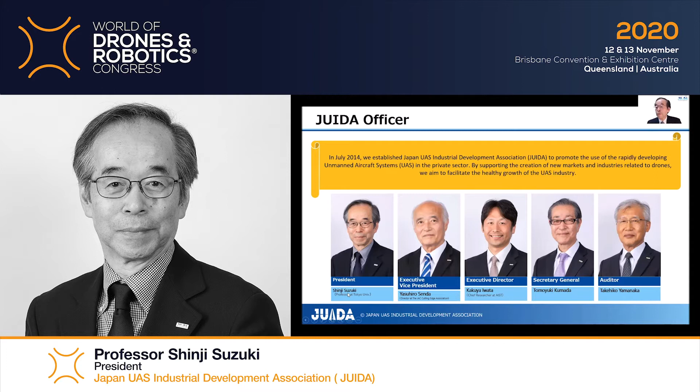I understand that everyone is living in quite tough times due to COVID-19. This Congress is being held after complex preparations.

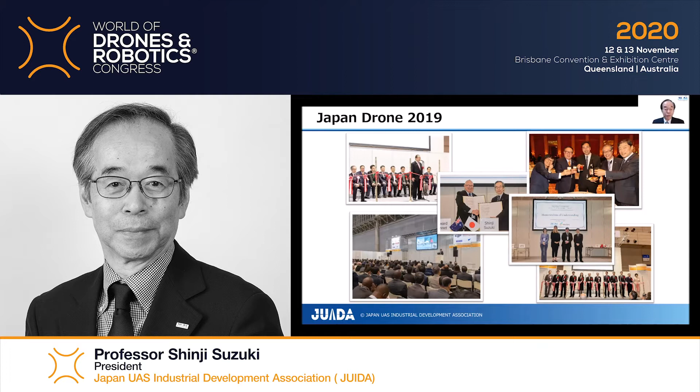JUIDA organizes Japan Drone Exhibition, the biggest UAS trade show in Japan every year. We gather more than 200 exhibitors, 15,000 visitors, and a long list of international guest speakers. We believe in international cooperation to improve and accelerate the growth of the UAS industry.

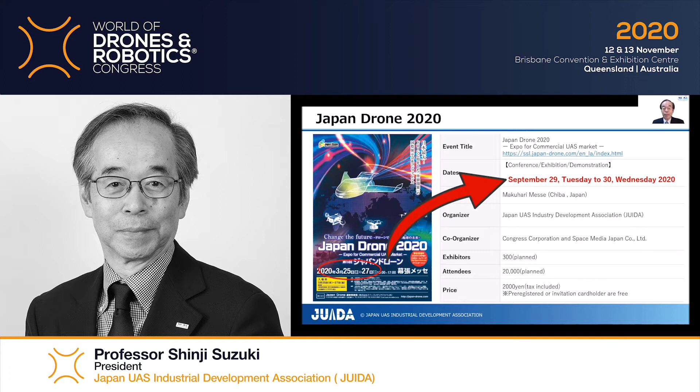This year, it has been postponed from March to September 29-30. The exhibition and international conference was held in a safe and secure manner by taking measures in accordance with COVID-19 guidelines for prevention of infection spread in the exhibition industry.

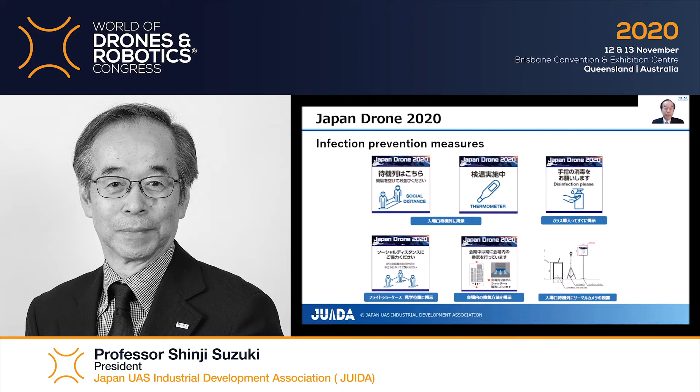This shows several photos of this exhibition, conference, and events. There were new exhibitions, lively business talks, and hot discussions at this Japan Drone 2020.

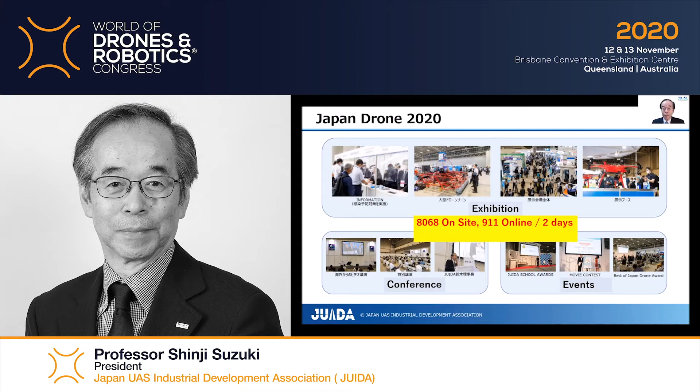Within the spread of COVID-19 infection, drones have shown various activities in the world. This is a flying demonstration using drone in China, and this is a drone spraying of disinfectant in India. This is a COVID test kit transportation using drone in Africa. And the last one is an interesting campaign using drone for social distance and face masks in South Korea.

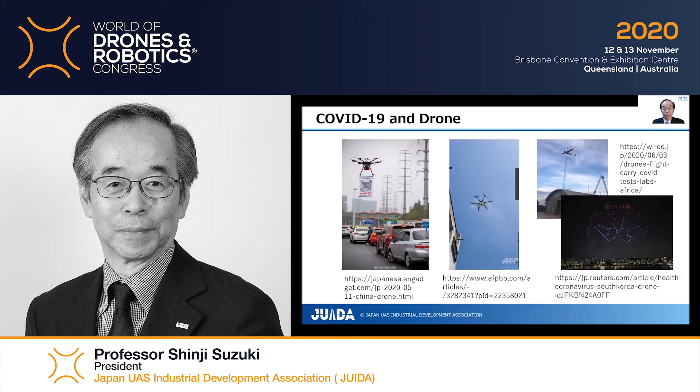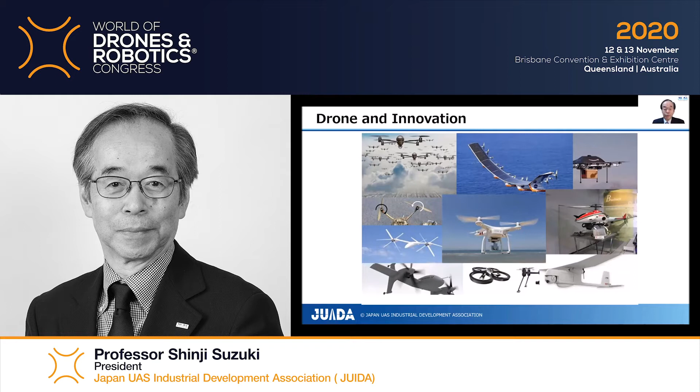These four fields are being strengthened, especially in the industrial field. The first one is drone delivery in remote island and mountain areas, and the second is the utilization of drones in the event of disaster. In Japan, drones are especially expected to play an active role in disaster response for typhoon or heavy rain.

The third one is security and guard application, and the fourth is the medical field. The transport of serum and AED is being considered.

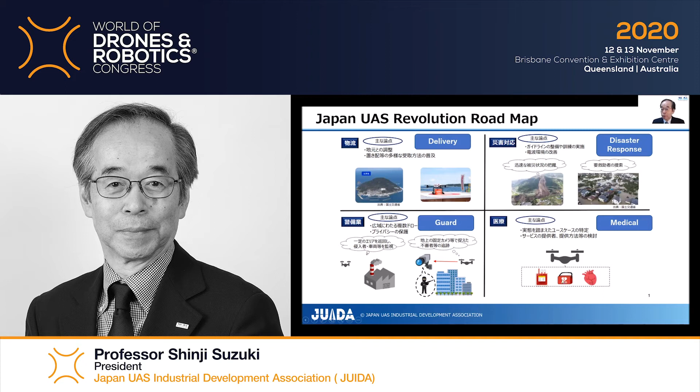JUIDA is active in various fields related to drone industries. I will present to you some of its key projects.

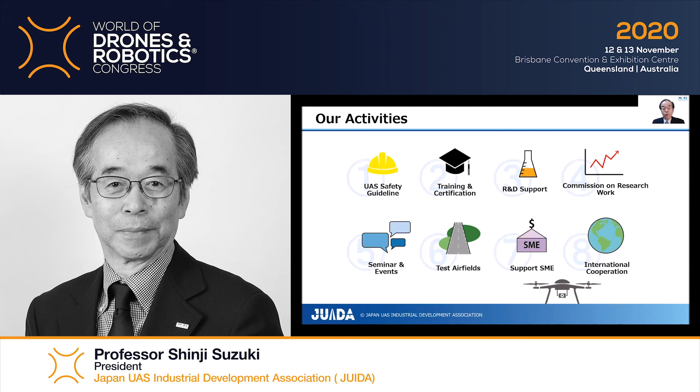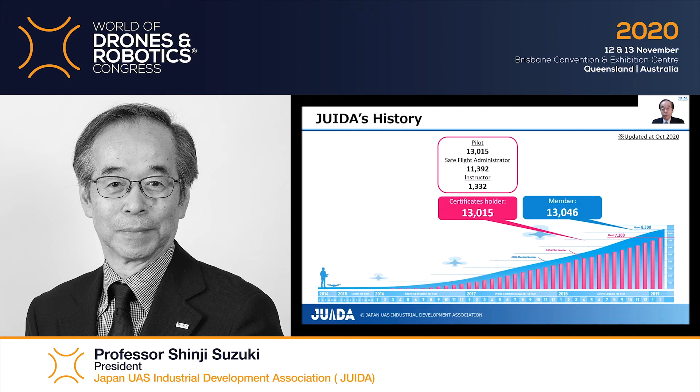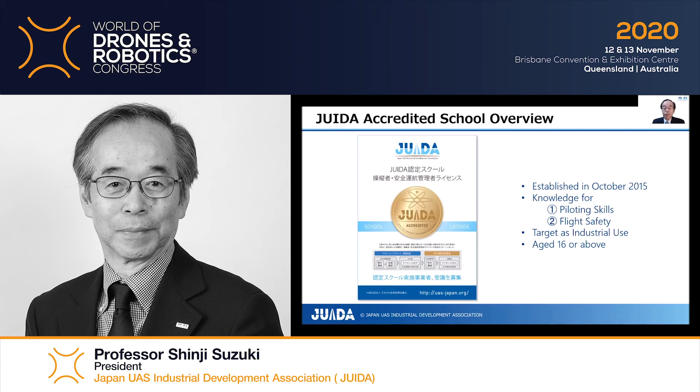Since 2014, we are working with over 13,000 members. It is supported by JUIDA certificate holders who graduate from JUIDA Drone Pilot School. We established the JUIDA accredited drone pilot school system, providing training courses, examinations, and certifications.

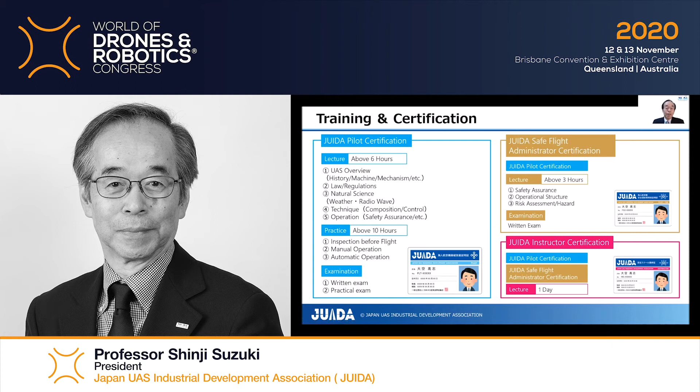Here is the training and certification system in JUIDA. Up to now, more than 13,000 drone pilots have gotten their licenses thanks to our schools.

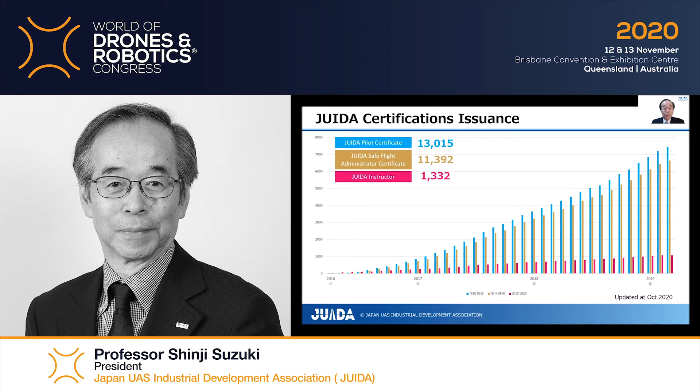There are more than 235 drone pilot schools in Japan, and recently, JUIDA schools have operated overseas as well.

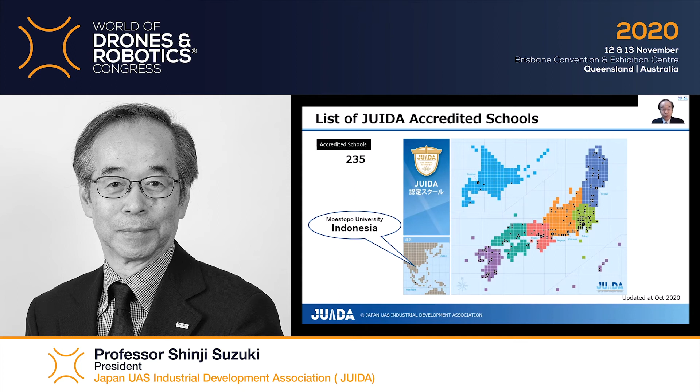The Japanese government has announced a policy to issue a national drone pilot license, and JUIDA will take even greater responsibility as the largest drone association in Japan.

As I explained, we are working to cultivate human resources. These activities have promoted the rapid increase of the drone service market in Japan.

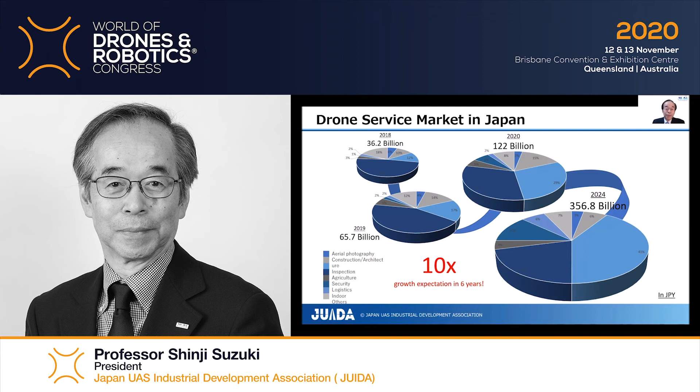Besides, we are part of the ISO International Standard Organization working group that drafts the upcoming standards of the drone industry worldwide. A total of 17 countries work together to harmonize the best standards that will be used by companies.

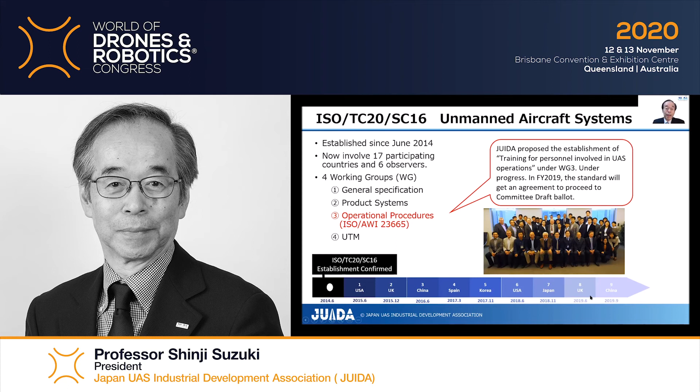In order to establish world standards for the drone industry, JUIDA has signed MOUs with 30 organizations from 21 countries.

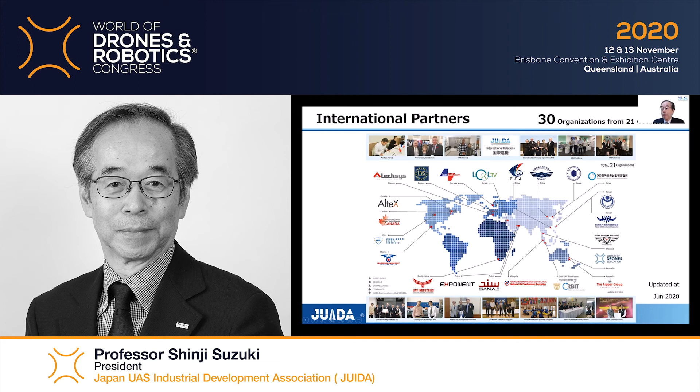Recently, we have been involved in the Fukushima robot test field. It's a large-scale project initiated by Fukushima Prefecture to revitalize the region damaged by the tsunami in 2011. Along with JUTM and JUAV, we carried out test experiments with drones flying beyond visual line of sight.

The test field is now fully open and extends to approximately 50 hectares with laboratories and research facilities. It is composed of 15 facilities onshore.

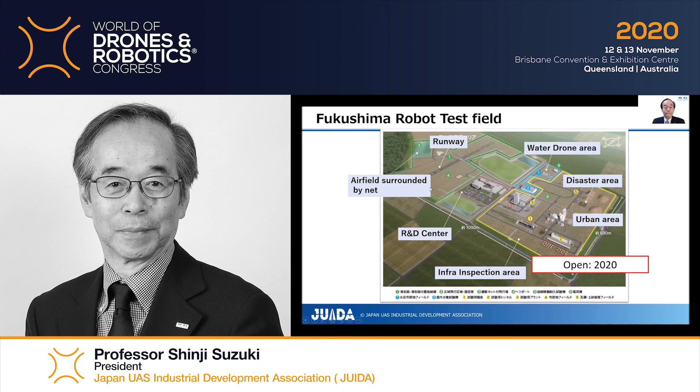It includes an underwater water drone area, a disaster area, an urban model, and infrastructure area with a bridge and tunnel, and chemical plants, an R&D center, an airfield surrounded by a net, and a UAV runway. These facilities were opened this year.

These facilities will be used to develop two passenger-carrying drones in the near future.

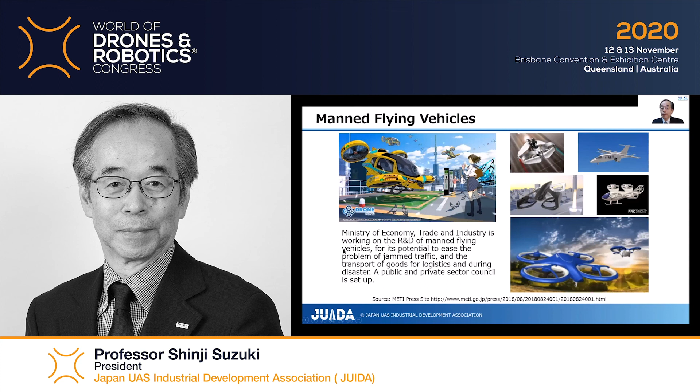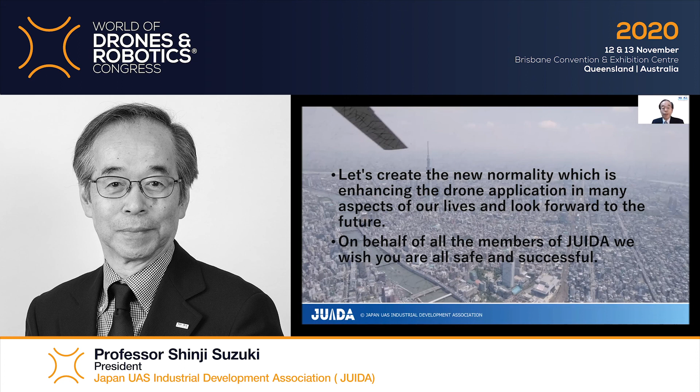Together, let's create the new normality, enhancing drone applications in many aspects of our lives, and look forward to the future. On behalf of all the members of JUIDA, we wish you all safe and successful. Thank you. Looking forward to meeting you in person soon.